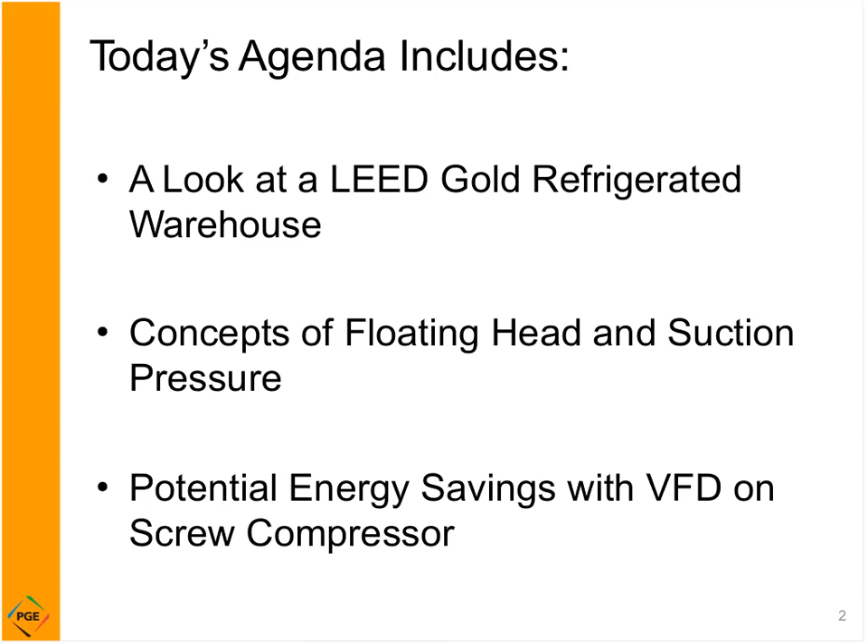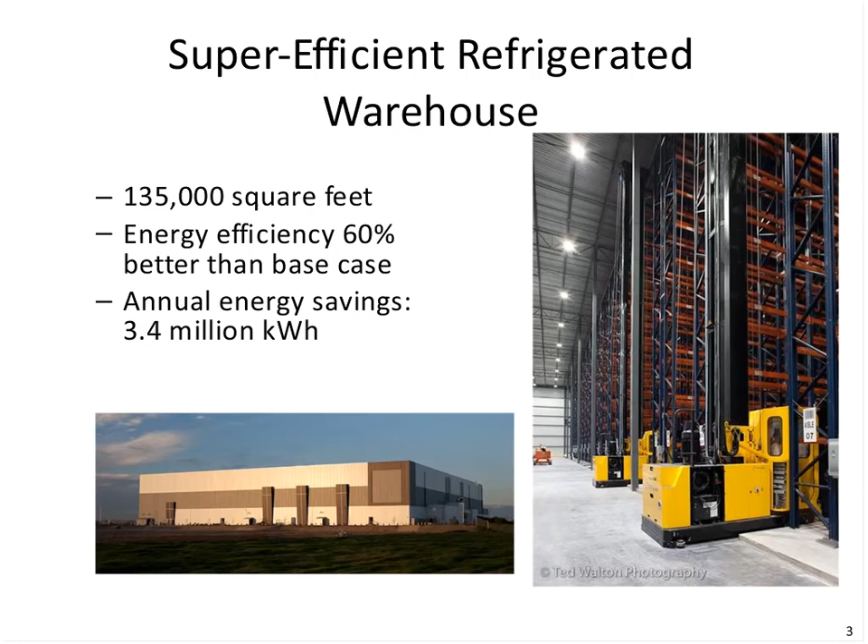So on this next slide here, we can see the refrigeration system that's supporting that particular warehouse. From the initial view here, we have 4 penthouses with evaporator coils in it, and suction lines coming back to 3, 235-horsepower compressors. These do have variable speed drives on them with volume index, so efficient compressors.

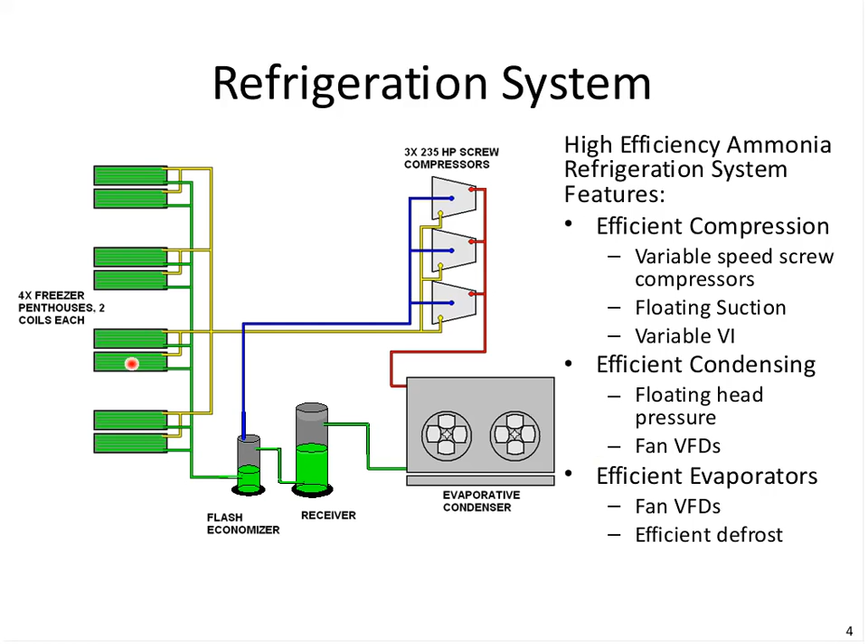The hot gas goes off to an efficient condensing unit, employing floating head pressure control with variable frequency drives on these fans. We also have variable speed on the evaporator fans, and we'll be taking a closer look at all of those aspects of it.

Here's a picture of the compressors. So this is a variable frequency drive portion on the compressor right here. There's also a slide valve. We'll do a little comparison later on between slide valve control and variable speed.

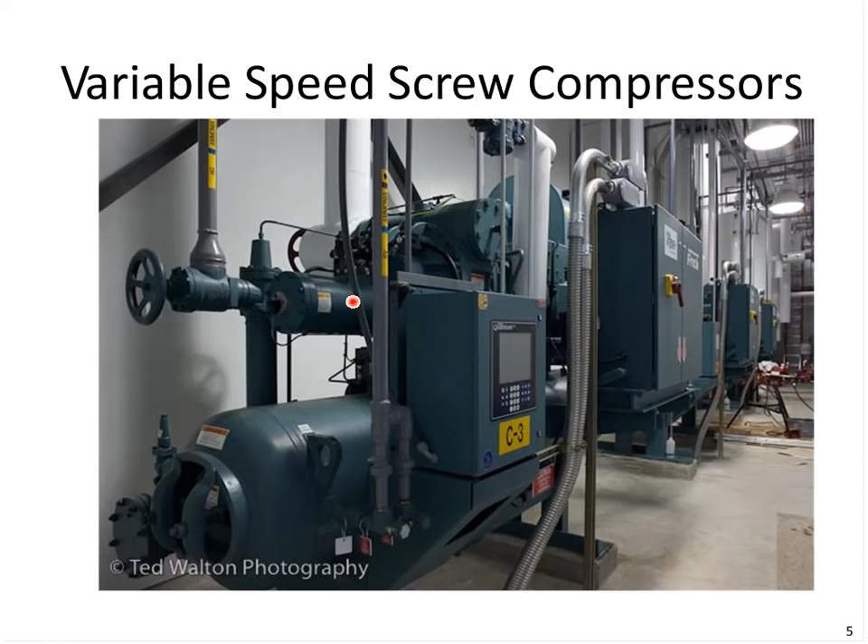Next slide here is looking at the back of the house, where we have the evap condensers. Here's a surge tank for accidental release of ammonia, which could actually be absorbed into that tank.

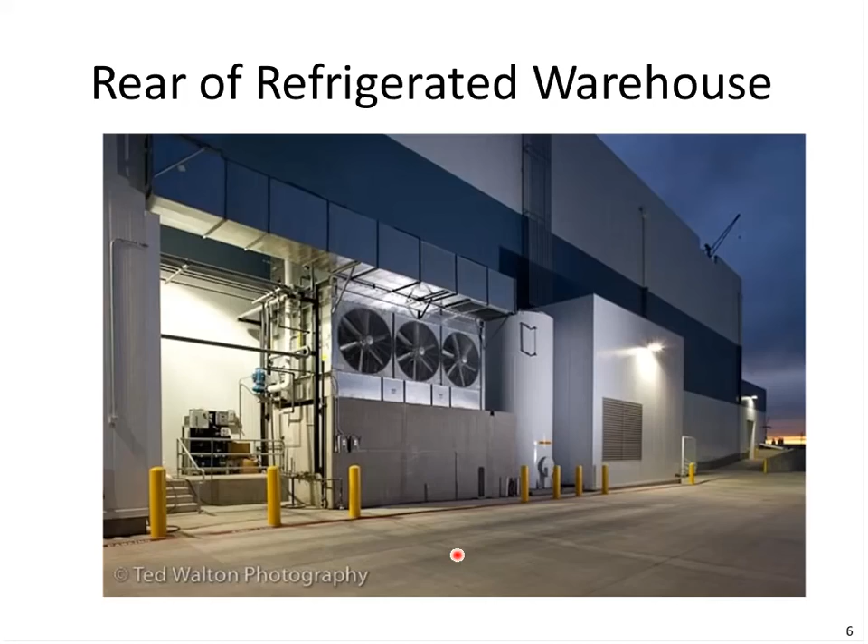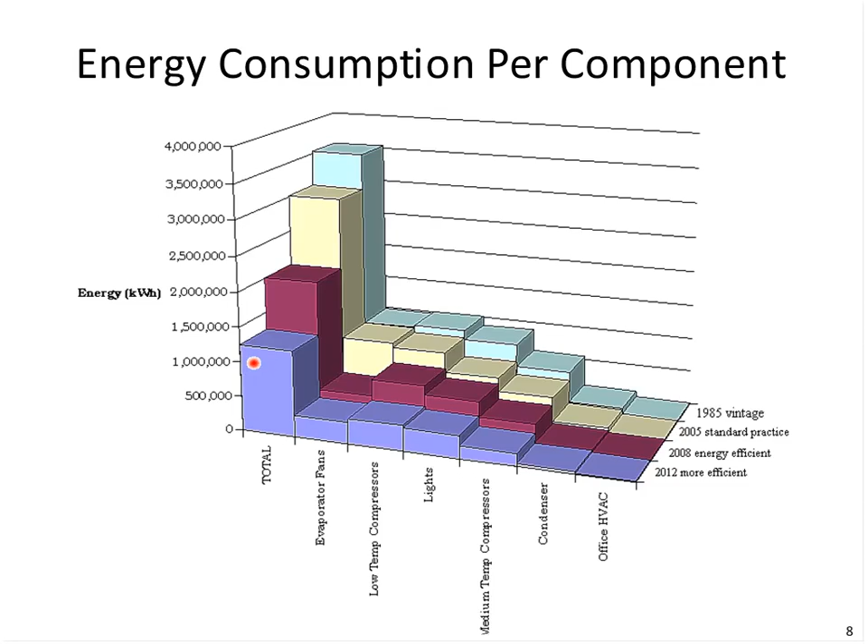Most refrigeration systems will be categorized by one of three groups. We have small single systems, generally up to about 75 horsepower, sometimes ordered from a catalog. Let's take a look at one of these.

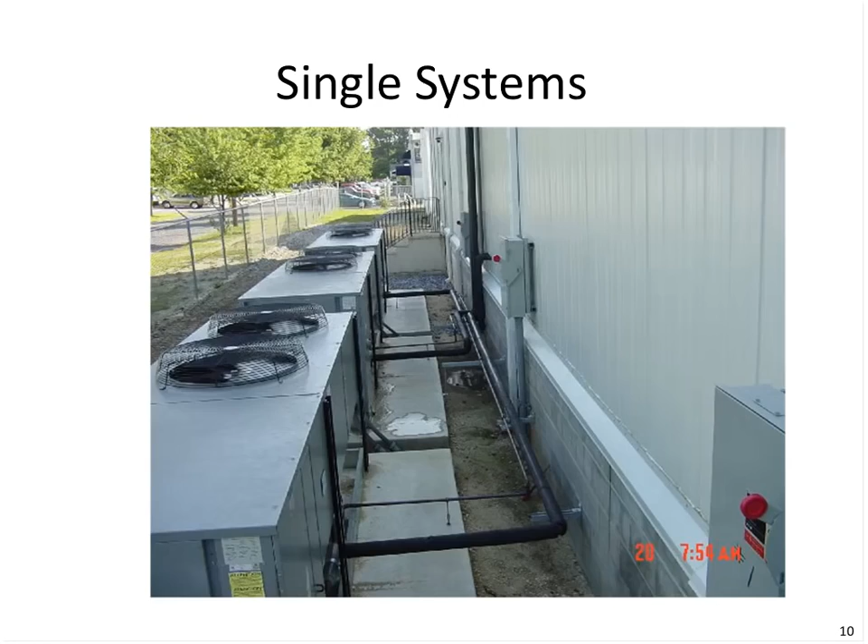Often we'll have more efficiency embedded into this system than you might find from a cataloged or single system. It takes a little more skilled maintenance to take care of, and also generally not easy to expand, since the piping and electrical is all skid mounted. It would not easily facilitate adding more capacity in another compressor.

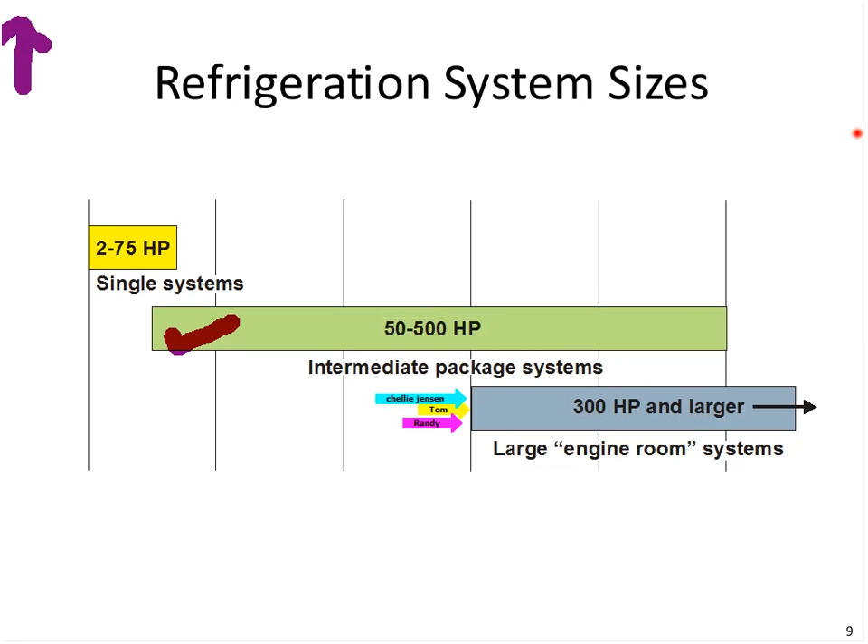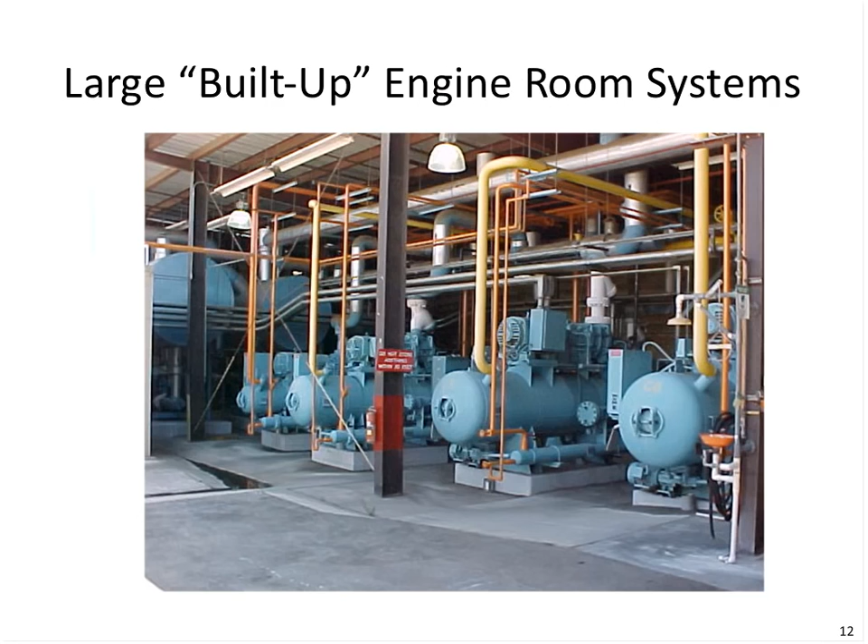Okay, scooting along then, since we're going to be looking more at the large built-up systems, we'll focus there, although many of the principles we're going to cover work even on the smaller systems. They just generally don't come included from the catalog. And in our larger systems, we usually see the screw compressors looking something along these lines.

There has to be some sort of metering device that regulates the flow of this liquid refrigerant into the evaporator at a rate that's equal to that refrigerant evaporating, or phase changing. We don't want to feed surplus liquid back to the compressor. We want to keep the liquid in the evaporator for the most part until it's utilized.

Some of the bigger systems do have a pumped liquid overfeed type of application where instead of a metering device, we have a pump and then a flow control device at the evaporator. But in either case, we're trying to get the evaporating done and get the cooling effect as a result of the refrigerant being at the lower pressure, which the compressor maintains by pulling the vapor out of the evaporator.

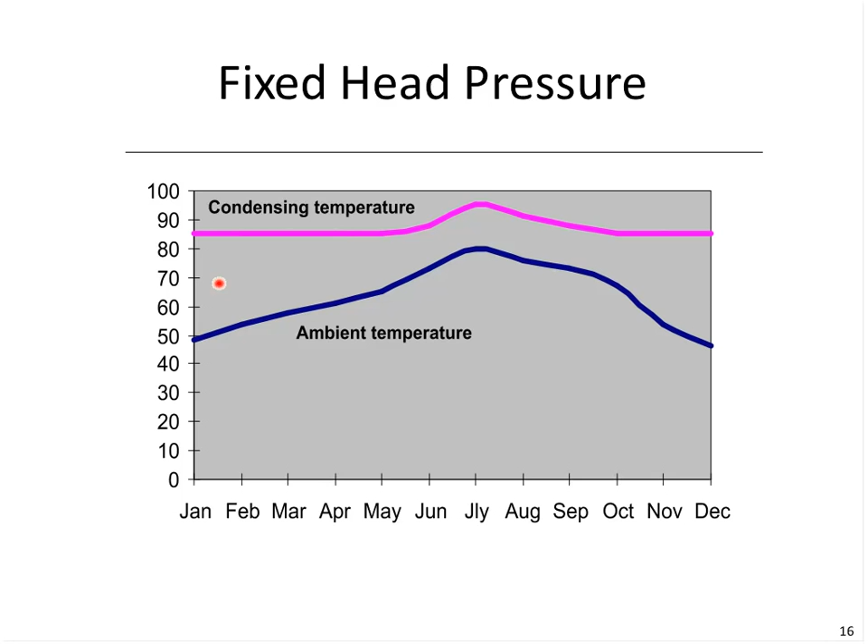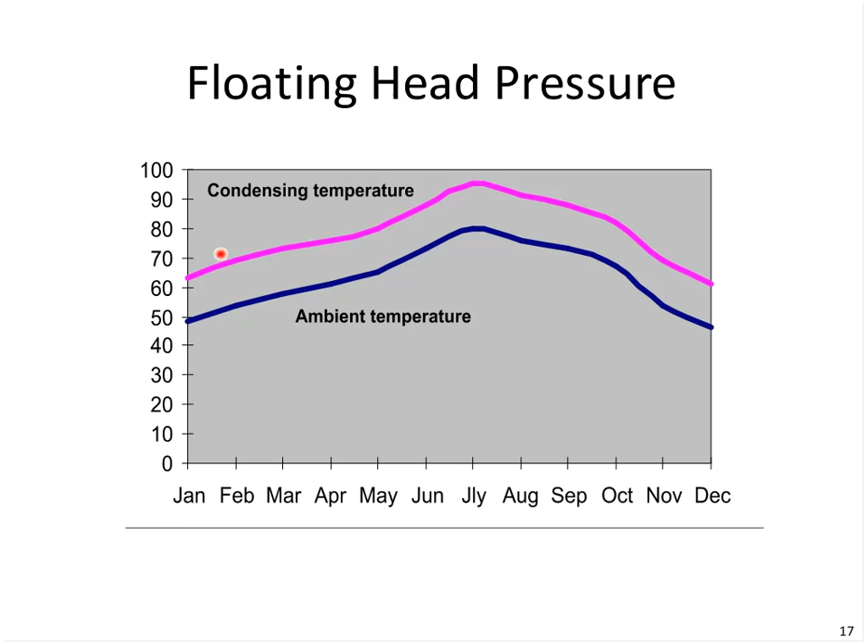Most of the floating head pressure savings occur during mild weather. So if we look at the concept of floating head pressure, notice when it's a 50-degree ambient, maybe we could condense at 65 instead of 85. Something like that would represent a substantial energy savings, and it's generally in the winter that we're able to take advantage of this. I know that's not when the highest load is here, but these are valid and achievable energy savings.

This is a form of active control, so as the ambient temperature goes up, our set point would change. What we don't want to have happen is a set point that's so low that all the fans end up at full speed trying to attain a condensing temperature that the system can't achieve. In other words, we don't want to set it too low.

There's a trade-off here. We're going to be using fan power to get the lower condensing temperature, but that's going to render savings at the compressor. So we just want to be sure we have more savings at the compressor than we expend at the condenser. At some point, we'll find a sweet spot where we're achieving the greatest savings at the compressor while slowing the fan down to a set point that's attainable based on the ambient.

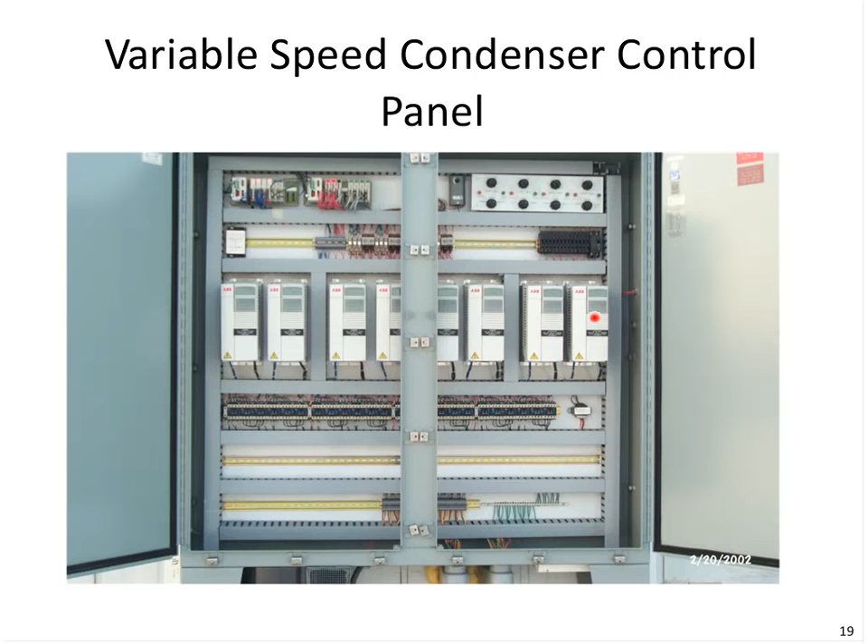We may ask, why wouldn't somebody have floating head pressure control? There might be some concerns here. Quite often, the condensing pressure is fixed at a higher pressure in order to avoid any vapor from forming in the liquid line on the way to the evaporator or the metering device. One way to keep that vapor from forming is to maintain a higher pressure.

So if that's the case, if we're avoiding flash gas, as it's called, by setting a higher pressure, we generally would consider a form of liquid subcooling to avoid that. Sometimes higher pressures are desired to maintain a steady flow of liquid from the system to avoid erratic operation. It's a high energy price to pay for something that should be controlled by another means than just having excessively high head pressure.

There are times when hot gas is taken off of the compressor discharge and used to defrost an evaporator. During those periods, it's often necessary to reset the controls to maintain the higher temperature and pressure during the defrost cycle, and then when defrost is terminated, go back to floating head pressure control. So defrost is a valid reason to have higher pressure.

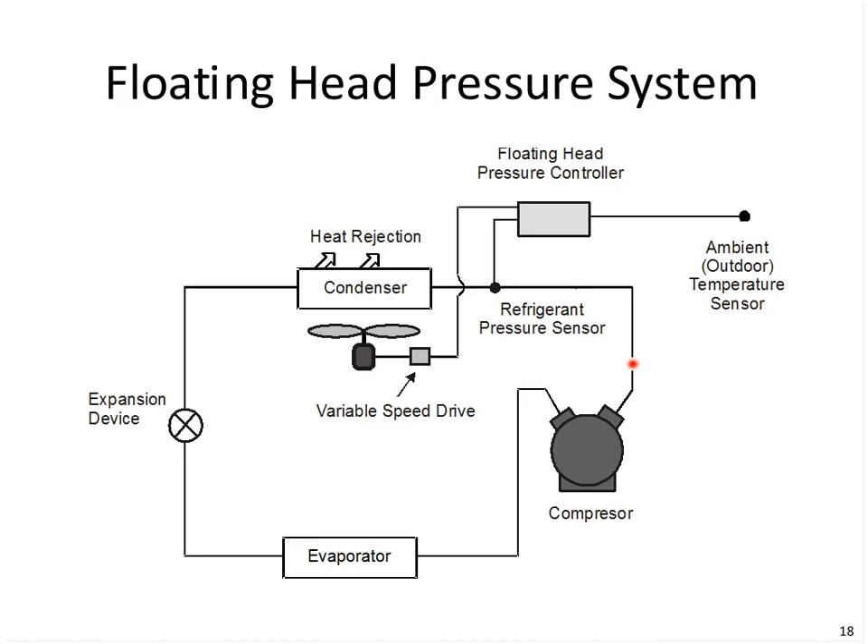If we move along past the control panel to a typical day in the life, or I should say two days in the life, of floating head pressure control here.

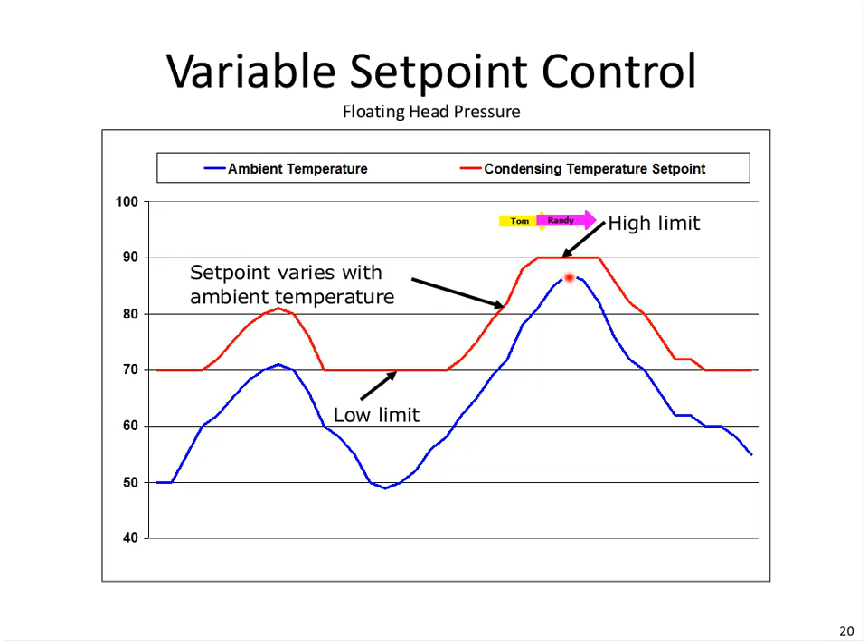I know some systems are actually incorporating a bypass in the variable frequency drive, such that if we know we're going to be operating at this condition for any length of time, they actually will switch the variable frequency drive out of the fan circuit and just run it across the line at 60 hertz, really saving the drive for a milder day. Okay, well, thanks for responding to that.

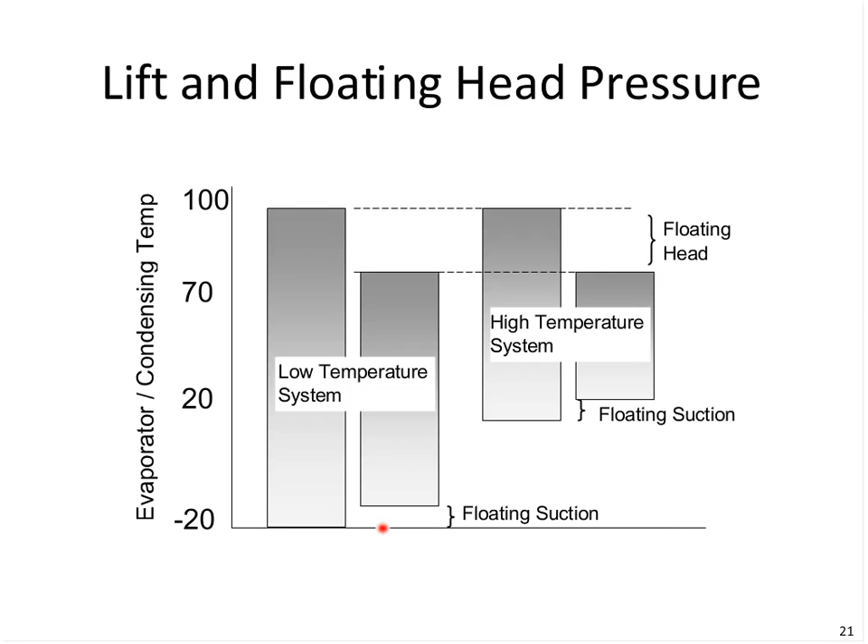So back to our chart here. We've just been looking at the floating head pressure. Let's take a second to look at floating suction pressure on the other end of the system. So what we're saying here is, how cold does this evaporator need to go? And generally, that temperature is dictated by the product or the process that we're running.

Now, there may be times when it's not the hottest day, or not so much product coming and going out of a warehouse, that we could actually set this temperature and pressure up to a higher set point and still keep the product at a desired temperature. Sometimes we will call that the floating suction pressure.

There's two areas that we use for this temperature adjustment. One would be the fan itself. So as we get down to the set point, we might slow this fan down, thus saving energy at the fan. And of course, any kilowatt hours expended on this fan motor ends up as heat in the refrigerated space.

So if we can slow this fan down and still maintain product temperature, of course the air has to be thrown across the evaporator and out into the refrigerated space sufficiently to keep the product at temperature. But the first approach would be to slow the fan down, and then the second approach would be to raise the suction pressure up, thus reducing the compression ratio or lift on the compressor.

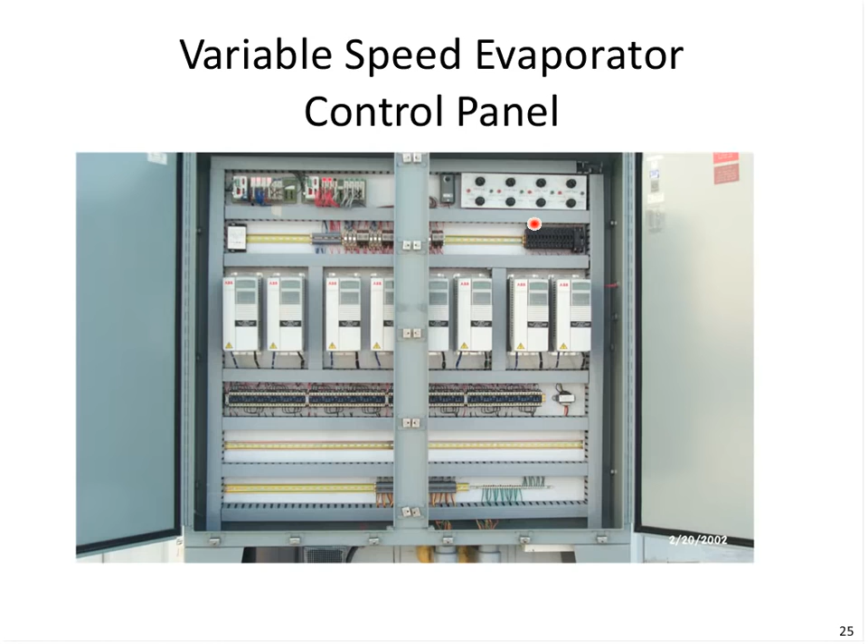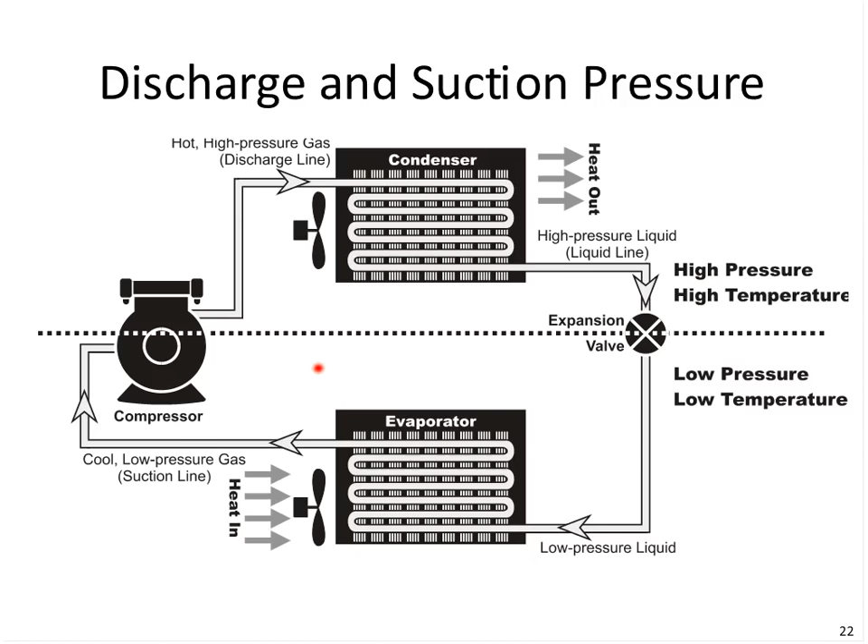That always concerned me as well. So if we're looking at this, the adjustment of that set point is just a constant attempt to get up to a higher temperature and resulting pressure, which then reduces the compression ratio and attains the savings.

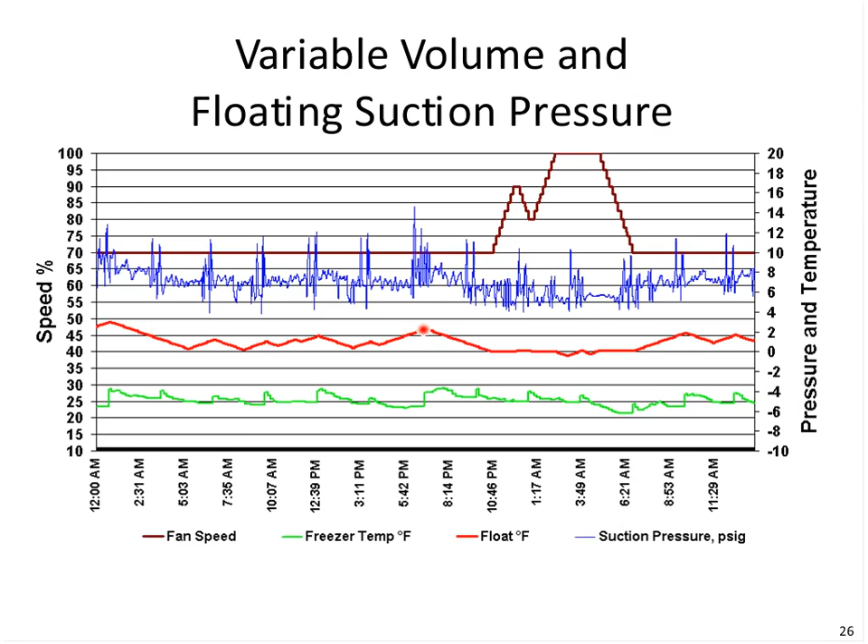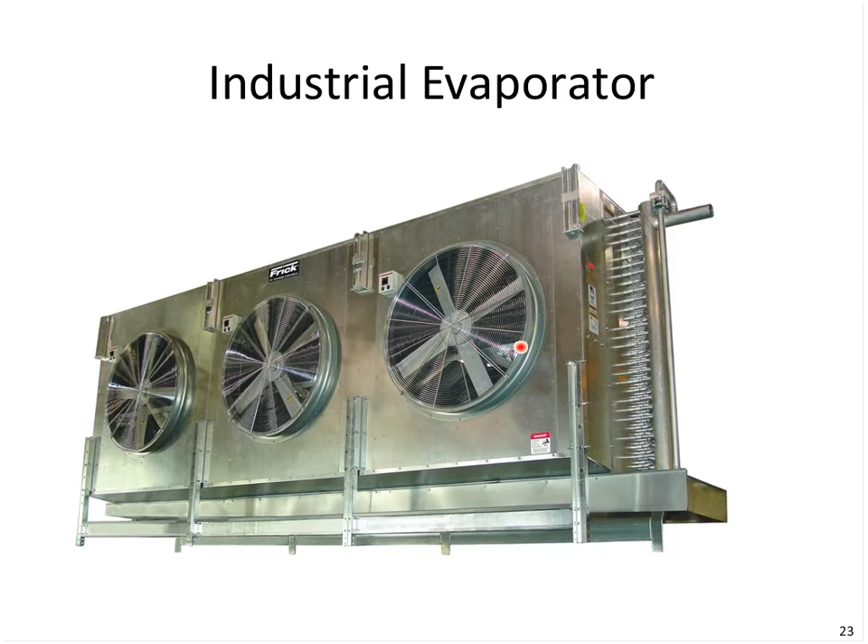Now, some coils have very compact fins. They get a lot of surface area, but it takes a lot of horsepower to draw the air over the coil. This is what we sometimes refer to as the specific efficiency of the evaporator. It doesn't have anything to do with the compressor - it's just how much horsepower the fan takes to overcome the pressure drop across the coil.

In our slide here, we've got about 400 evaporators. Each dot represents an evaporator out of the catalog, and we're getting BTUs of heat transfer per fan watt. Notice a really efficient low-temperature coil could convey, say, 60 BTUs per fan watt, where an inefficient one might only convey 20 BTUs. So this would take 3 times more fan energy to get the air across the coil as this one.

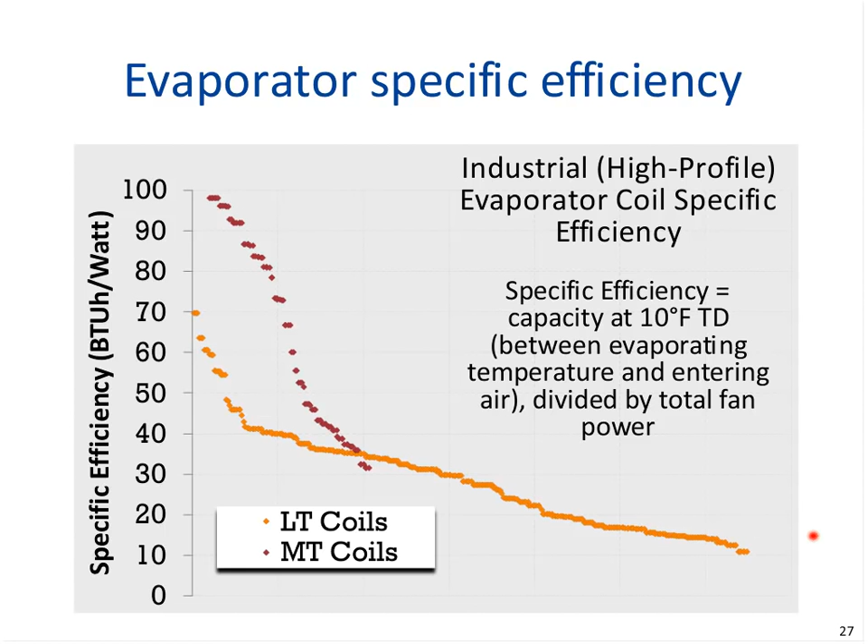And with the medium temperature coils, we see similar behavior. These would be considered efficient coils, then everything down at the bottom on medium or low temp here are inefficient coils. This specific efficiency is not in the catalogs - this is something where you have to take the data from the catalog, do the math, and come up with a number. So not all evaporators are created equal. Some of them are real dogs, as you can see on this chart.

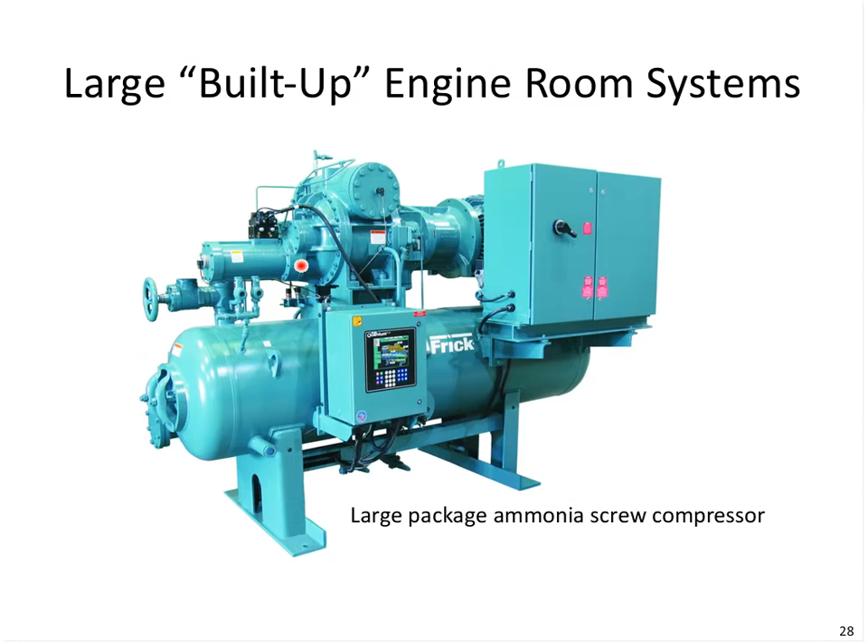Okay, so the last thing we wanted to address was the compressor itself. We've got the variable speed drive in this cabinet for changing motor speed, and here's the slide valve. Let's take a closer look at the slide valve. When the slide valve is actuated, it opens up and lets refrigerant gas avoid full compression going through the rotors.

It lets some of that gas go back right around to the suction. As a result, what comes out the discharge is some fraction of the full quantity of gas that could go through those rotors. So we could have half of the refrigerant just being released right back to the suction and half going through the full length of the rotors. This is an adjustable amount, and we can unload this compressor rather than turning it on and off - we can allow any percentage of the gas back around to the suction.

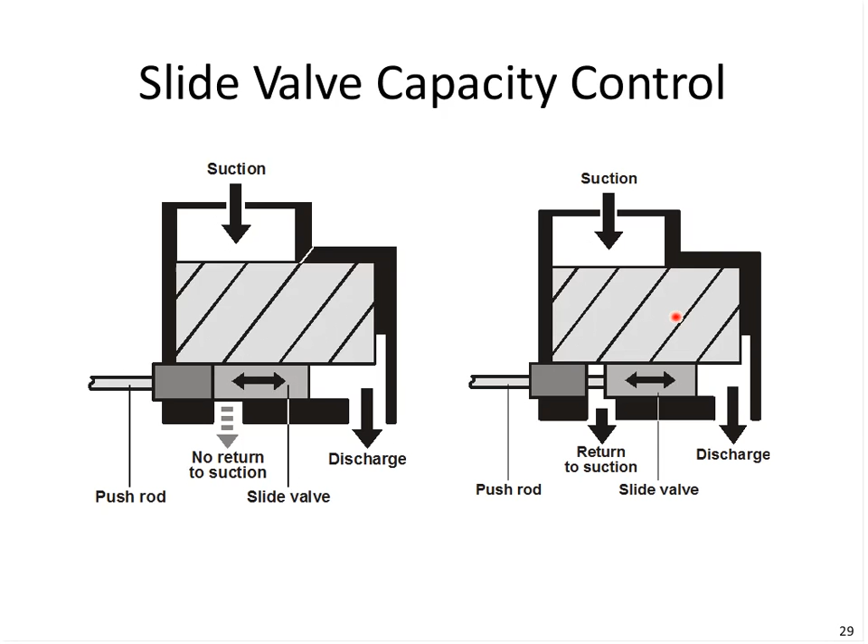An alternative to that would be to just change the speed of these rotors. So instead of allowing the gas to return to the suction, slowing the rotors down achieves the same reduction in flow rate or mass flow. However, the reduction in speed reduces the friction occurring between the rotors against each other and against the housing in the compressor, thus giving us an additional benefit over the slide valve unloading method.

This next slide shows capacity along the bottom of a typical screw compressor, with percent power input (brake horsepower) shown as well. What's interesting to note is that if we're at 50% load on the slide valve at plus 40 degrees, we're at about 55% power to deliver 50% of the mass flow. Not so bad. But if we're down at minus 40 degrees, it still takes approximately 75% of the power to deliver 50% of the mass flow.

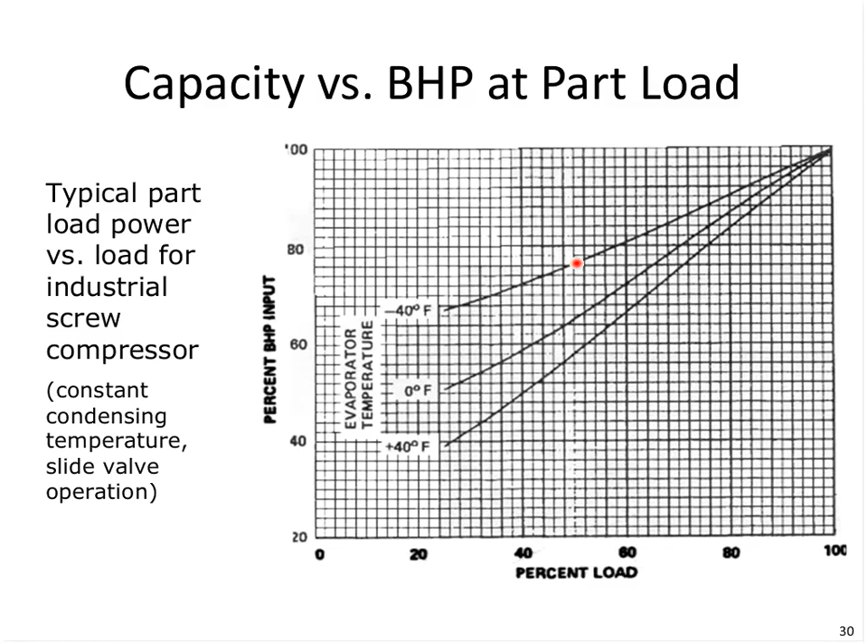So there's a pretty severe penalty of using the slide valve in a low temperature application. When we compare this performance to variable speed, we get more savings with variable speed in the low temp than in the medium temp. Let's take a look at a couple typical compressor performance curves.

These are screw compressors with slide valve and variable frequency drive. Here we're at minus 25 degrees, single stage, 125 horsepower compressor. We've got two curves representing compressor power or pumping, expressed in pounds of refrigerant per motor kW. So the more refrigerant compressed per kW, the more efficient it is.

At 3,550 RPM with slide valve control, performance looks something like that. If we have variable speed down to 50% flow and then slide valve below that, the area under the curve, or between these two curves, is a savings expressed with this line right here, improved efficiency. At about 50 or 40% flow, we're seeing about 20% energy savings of variable speed versus slide valve. So this is a low temperature application.

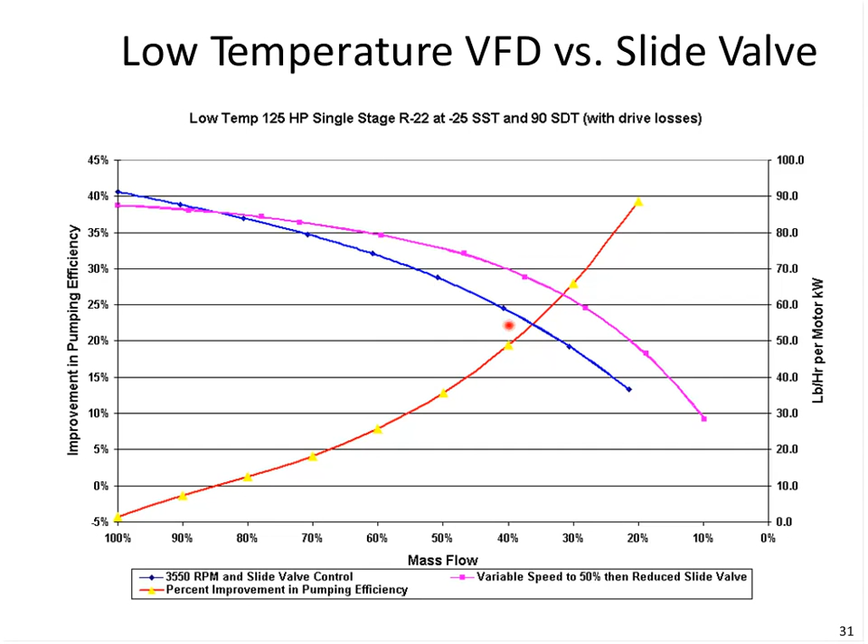Generally, if there's a lineup of compressors—say there's 3 or 4 low temperature compressors and 3 or 4 medium temp—maybe variable speed is used on just one of the compressors as your trim compressor, and the others run either across the line, pretty much fully loaded, with the variable speed one used as the trim. Some put variable speed drives on more than one compressor, although I think most of the benefits can be achieved from just having variable speed on one compressor at that temperature lineup.